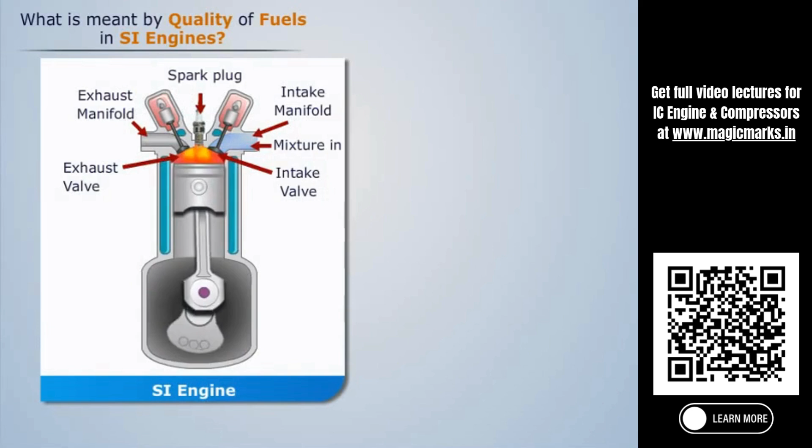What is meant by quality of fuels in SI engines? We know that SI engines use gasoline or petrol as fuel, and the SI engine produces power by combustion of gasoline.

Gasoline is a mixture of a number of low boiling point paraffins, naphthenes, and aromatics of varying proportions. There are certain qualities that a particular gasoline should have to qualify as SI engine fuel. These properties have been discussed below.

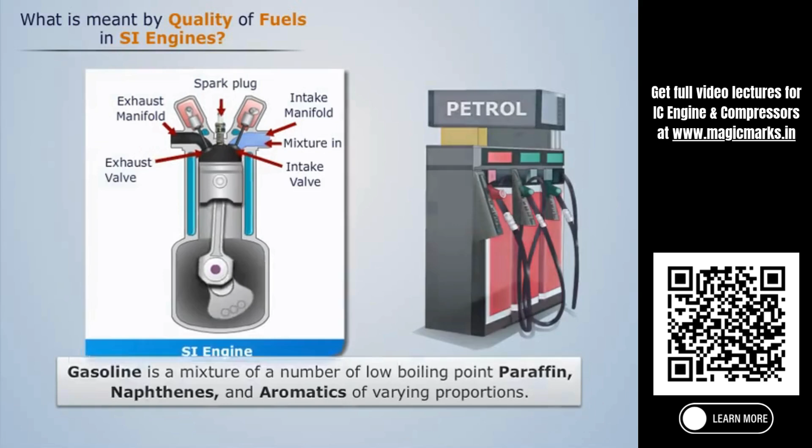Volatility: the gasoline should be volatile. A certain part of it should vaporize at room temperature to allow easy starting of the engine. Note that better vaporization of the fuel leads to even distribution inside the cylinders, which in turn leads to better acceleration of the vehicle.

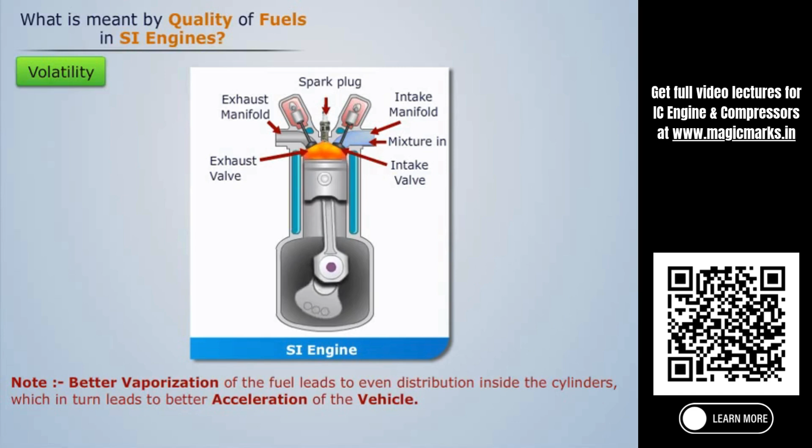Dilution of the lubricating oil in the crankcase. As the fuel is splashed in the cylinder, some lubricating oil from the crankcase is also washed away with it. This leads to an overall decrease in the quantity of lubricating oil and poor lubrication of the engine's moving parts. To prevent such possibilities, it is important that the type of gasoline used for the engine should vaporize before it gets combusted.

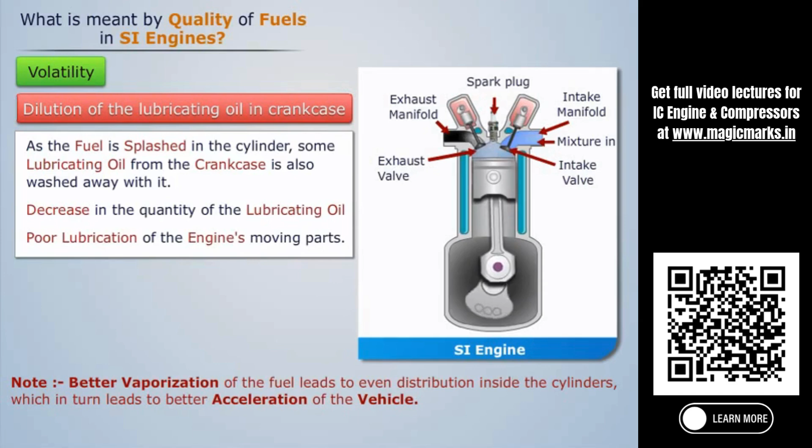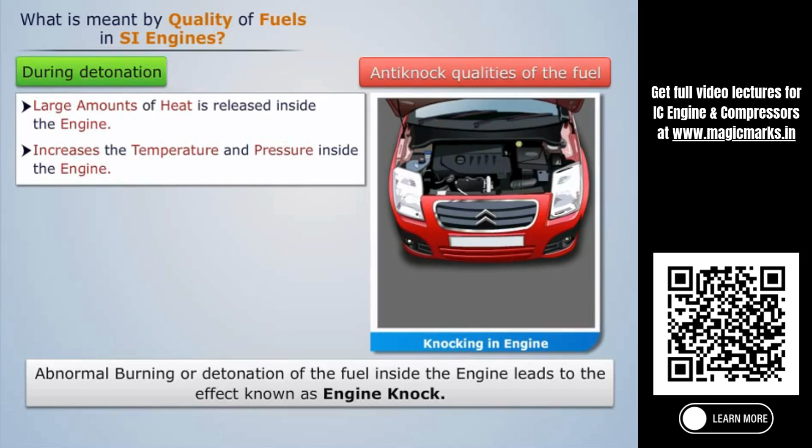Anti-knock qualities of the fuel. Abnormal burning or detonation of the fuel inside the engine leads to the effect known as engine knock. During detonation, large amounts of heat are released inside the engine, which excessively increases the temperature and pressure inside the engine, drastically reducing its thermal efficiency. The fuel should have the tendency to avoid creating the situation of detonation. This quality of the fuel is the anti-knock property of the fuel.

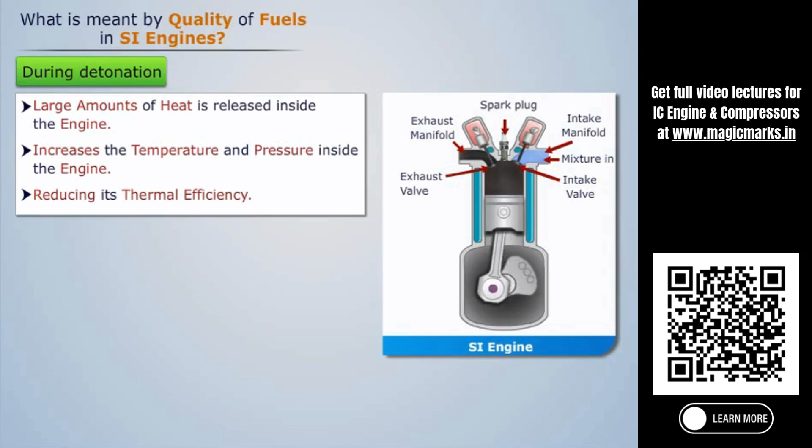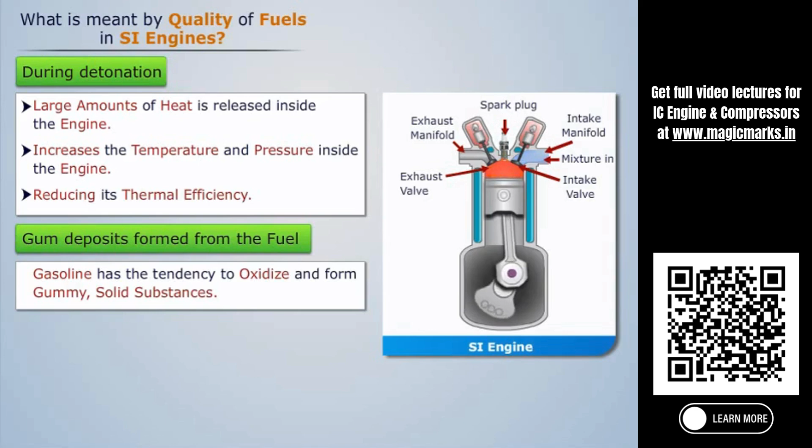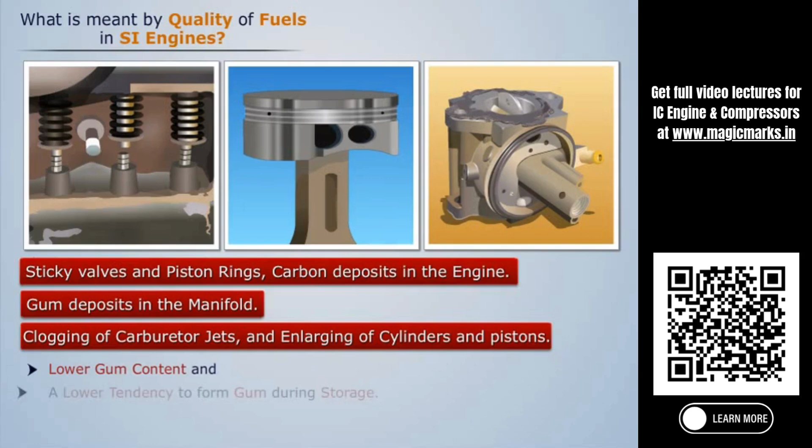Gum deposits formed from the fuel. When gasoline is stored for longer periods of time, it has the tendency to oxidize and form gummy solid substances. This will lead to sticky valves and piston rings, carbon deposits in the engine, enlarging of cylinders and pistons, gum deposits in the manifold, and clogging of carburetor jets. The gasoline used in the engine should have a tendency to form lower gum content and have a lower tendency to form gum during storage.

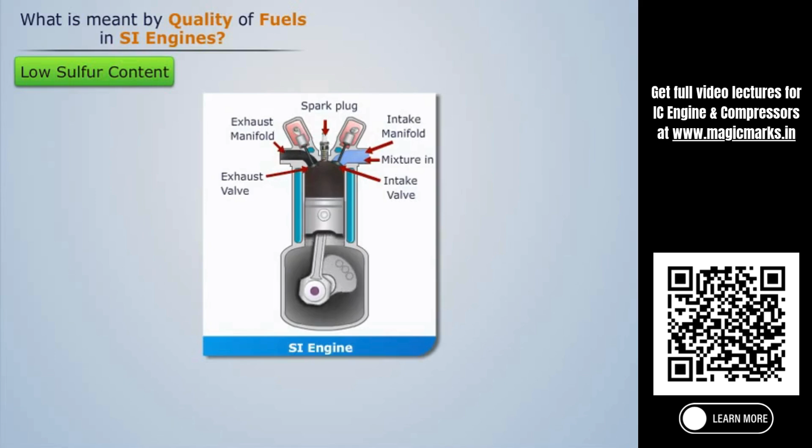Low sulfur content. Hydrocarbon fuels may contain sulfur in various forms, like hydrogen sulfide and other compounds. Sulfur is corrosive in nature, and it can cause corrosion in fuel lines, carburetor parts, injection pumps, etc. Sulfur also promotes knocking of the engine. Hence, its content in the gasoline fuel should be kept to a minimum.

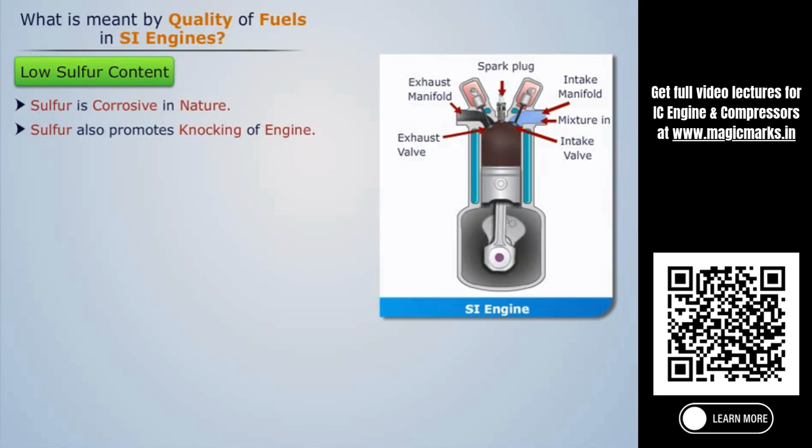Thus, the quality of fuels in SI engines are the properties such as volatility, dilution with lubricating oil, anti-knock qualities of the fuel, gum deposition, and low sulfur content, which make it an ideal fuel for combustion. The related term is...